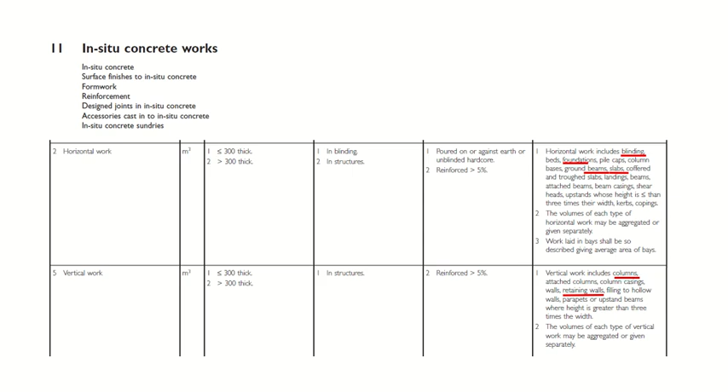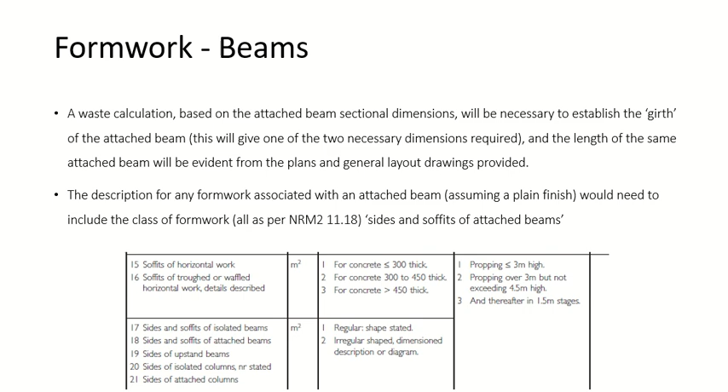So we are going through some examples. Today we'll go through some more about the measurement of reinforced concrete structure, and we are talking about the superstructure, which is above the ground. The NRM sections are shown to you. What are we talking about? Beams, columns, and slabs, mainly their concrete and formwork. We already finished the reinforcement of these items earlier, especially for the columns and beams. We have done it. Am I going too far?

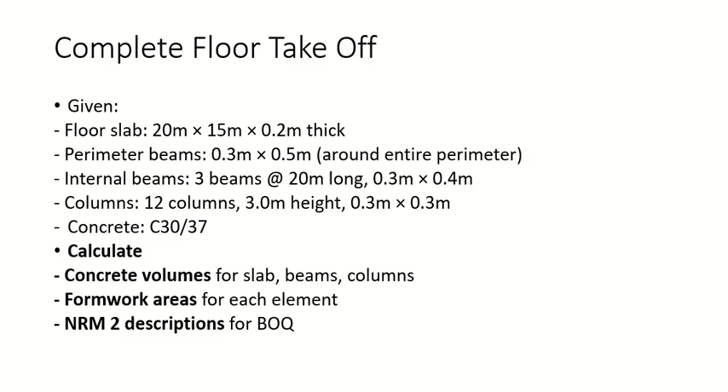Yes. Okay, this is the example which we did last time, including the beams, columns, and slab. Now I'll show you something which is already done in the slides. Did I upload them? No, right? I didn't upload them. Okay, so this is the plot we have.

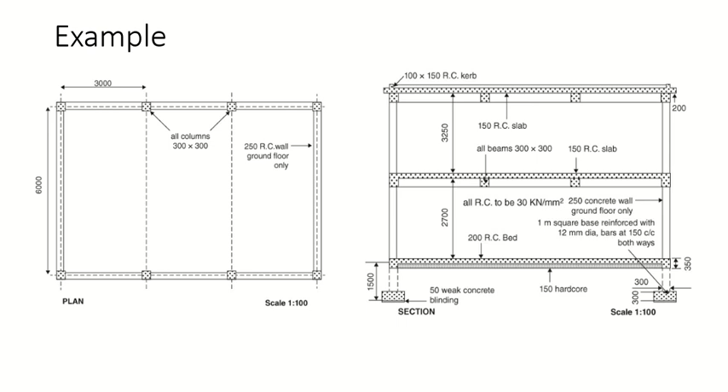This is center to center 3. We have 3 panels like this, so 3 into 3, 9. And then again you add the columns on both sides.

This will give you the external girth, the external perimeter of the building. They give you the center line dimension, right? So when you do all this, this will give you the external girth.

Now I told you, we do the excavation for the topsoil up to what? Internal, external, center line, or something else? Center line.

He is very busy. Totally in the office mode, huh? Coffee here, laptop here. Let this guy go to hell.

Yes, center line, yes. Go ahead. Center line. Everybody agrees, right? Like you guys have a plan to get a D in the course. All of us together, right? Then we will blame Dr. Onab.

Huh? Topsoil and excavation up to the projection of the footing. Okay, topsoil and excavation is up to the projection of the footing, not center line. Center line is for excavation of the footing itself. We are talking about topsoil.

Okay, topsoil. So for that you have, this is 300 millimeters, and you have up till here. So I have to add this much. Okay, this thickness is how much?

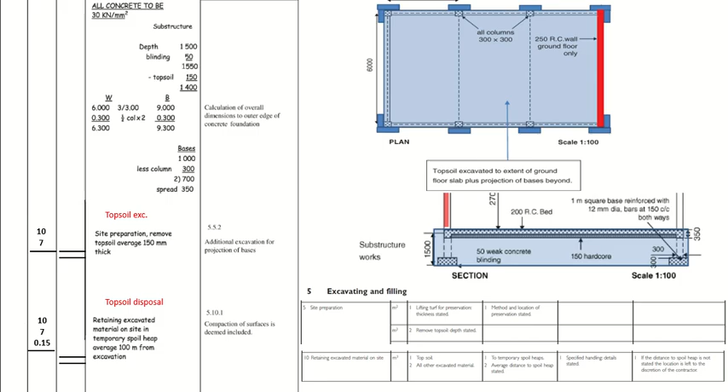But in this one, we also filled concrete for what? We also filled concrete for the column, right? So this must also be subtracted from the backfilling because this is already concrete. I don't need to backfill it. Got my point? You did the excavation up to the blinding, then you filled the blinding, then you filled the footing, and then you filled the column. Okay, so we will subtract all of these and the remaining will be backfilling.

Okay, so 1 meter by 1 meter, 8 footings, 1 meter by 1 meter, total excavation was 1.4. From there I subtracted the height of the blinding and the height of the footing. So remaining is 1.05. Got it? But this is not the total backfilling because I filled the columns as well. So 8 columns, 0.3 by 0.3 and same height obviously.

Same height, which I already have because I'm doing it from this. I will do the backfilling for the portion I did the excavation for, right? Okay, am I clear or not?

Your column is going up to 1.2 meters, right? Your column is going up to 1.2 meters. Okay, but that includes the hard core and everything. So in 1.2 meters, I will do filling of 150 millimeters of hard core. I will not do the backfilling there.

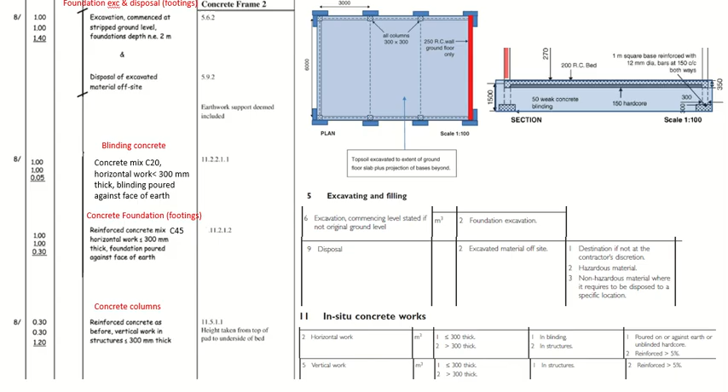So this is why the column height was 1.2 there, and here it is 1.05, because this is for backfilling. From 1.2 I subtracted the 150 millimeters of hard core, which I will fill with the hard core, the other material. This is backfilling of the same soil. Clear or not? Clear everybody? Ahmed, clear?

Okay, so whatever you will get, it will be your backfilling. Then the formwork to the column. Who will explain me this?

1.2. The height is 1.2. Okay, what else? And there is another 1.2. There are two, right? It's a square, like square dimension, meter square, right? 1.2 into 1.2, yes.

0.3 multiplied by 4. 4 sides, right? 4 sides of the column. Okay, this is height of the column. Okay, this is the height of the column. Height goes after, right? There is the height of the column and this is the girth of the column. 4 sides, each side is 0.3, 0.3, 0.3, 0.3.

Got it? Clear? The area multiplied by height? No, this is not the area. This is the perimeter of the column. We are doing it for formwork. So height is 1.2 and you don't take the area, you take the perimeter. Each side is 0.3, 0.3, 0.3, 0.3. So total 1.2. Clear? Okay.

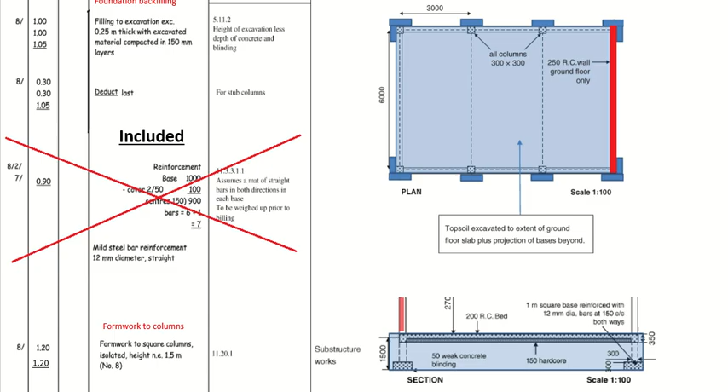Footing is never precast. So where is the formwork of the precast? Where is the formwork of the footing? Where inside? But we didn't calculate it. We will calculate it, she will do it inshallah for her project. Okay, we don't. What? We don't have the formwork for footing.

And the reason is, why are you doing the formwork for concrete? Because, why does concrete need formwork? To shape it, right? Okay, so we need the supports. And where is the footing? On the ground. Do we have the support? Yes, we have, right? Okay, that's why we do the blinding as well.

So the actual concrete is on a firm support, level support, not on the ground. And the sides, again, your excavation is the sides. The thing which you excavated is the same size as the footing, right? Same size of the footing. You need 1 meter by 1 meter footing, your excavation is 1 meter by 1 meter. So you don't need to worry about the sides and you don't need to worry about the bottom.

No formwork required. But the column over the footing, right? So we still need the sides to be supported. The excavation is 1 meter by 1 meter, column is 300, so you need the support from the sides. Okay, what else are we doing?

Okay, 9.3 and 6.3. 9.3 and 6.3. This was the external girth. Now I am going to fill hardcore inside the plot. So I need internal girths now, or the internal dimensions. I need the internal dimensions.

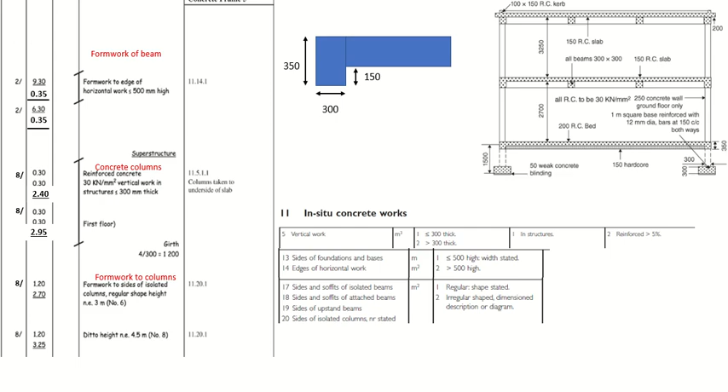Guys, multiply by the length. They took the length to the external, so they are not doing it in panels. Formwork they are not doing in panels. Clear or not?

One difference you will see between the concrete of the beam and the formwork of the beam is the dimension. For concrete, you take center line dimension. But for formwork, it's still to the end—they take the external dimension, and they do it in one go.

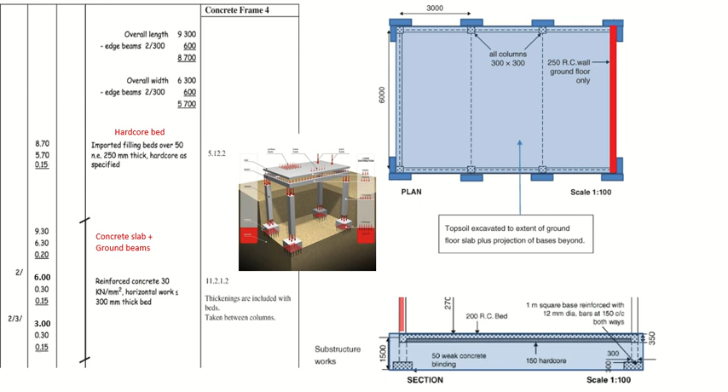They are not doing it in panels. You see the 9 meter direction? What did we do with the concrete? 3 meter, 3 meter, 3 meter, right? Formwork? No—from one end to the other end, same, as 1 unit. 9.3, from one end of the slab to the other end of the slab. Got it? Clear?

Clear? The reason is the same as I mentioned for the girth. When you take the height of the formwork from this side, from your left hand side, you take it with the slab—because the beam is cast with the slab. So the slab is still the external, not center line. So the beam is cast with the slab, and you have to take the length up to the slab. For the slab we took the external dimension too. So this 9.3 and 6.3 are the edges of the slab.

Clear? For concrete you can do paneling and each beam separately, no problem. But formwork will be till the end of the slab because they are attached. Any questions? What is the next item?

Now we are done up to the floor level. Excavation, filling, column, beam—everything done. Now we are going to the top, and we are starting with the concrete of the columns.

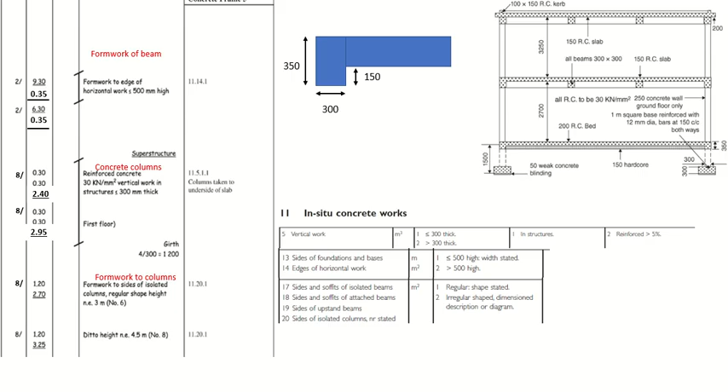Then you have the formwork to the columns. 1.2, we know that, right? The perimeter. And the height is up to the slab now, right? The height is up to the slab, so the beam is included in it. They did not subtract the beam for the formwork, they did it with the beam. So the formwork of the column is with the beam in this case.

Concrete for the floor slab. You will take the external dimensions again and the floor slab thickness, and multiply by 2, because both floors have the same area. The area is not changing, it's the same area. So multiply by 2, you can do multiply by 2. If the area was changing, then I would not do this.